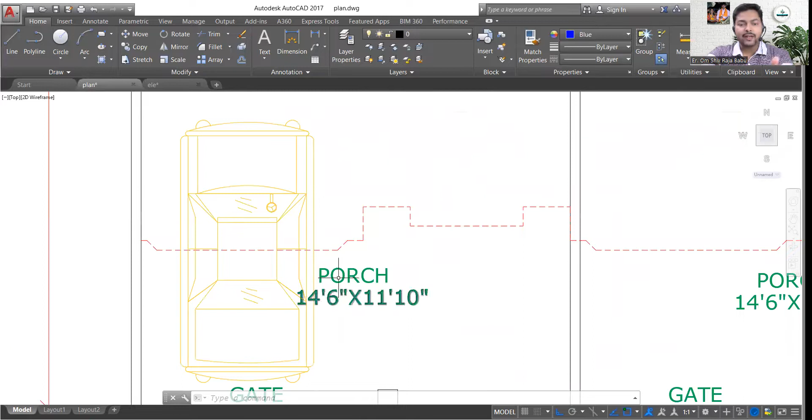Now for this north facing building, both units are identical. I will read out the left one and you will easily understand the right one. Here is our gate, which is 8 feet wide, a spacious one. Then we have a porch area of 14 feet 6 inches by 11 feet 10 inches, spacious enough to park one four-wheeler and two to three two-wheelers.

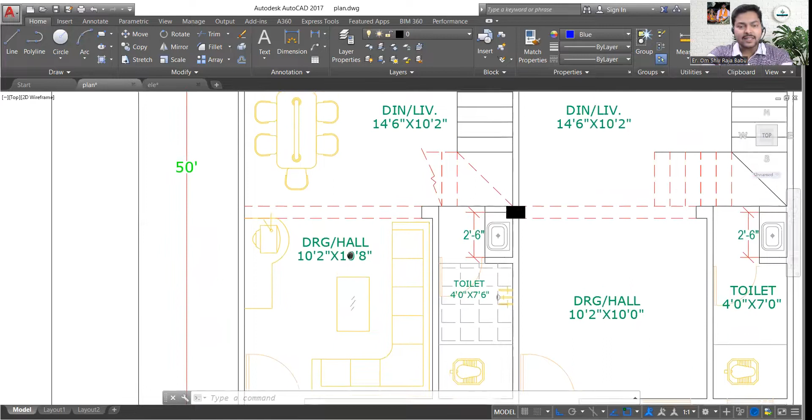Then we have a drawing room, or hall, of 10 feet 2 inches by 10 feet 8 inches, a standard size hall. Even with a small front, you can get a spacious internal area like this and make the most of your carpet area. As you pass through this hall, you go to the dining cum living area, and you will find the staircase from here.

On the right we have our plan layout, and on the left our furniture layout. In a furniture layout we already place the furniture so we can identify how much space we have for movement and the right place for our furniture. So whenever you approach an architect, ask for the furniture layout, not just the plan layout. That will help you visualize your house.

You can use this staircase to reach the first floor, because this is a G+1 building. Beneath the staircase we have our utility area of 2 feet 6 inches, which is quite enough. Then we have our toilet of 4 feet by 7 feet 6 inches, a good internal dimension for a toilet.

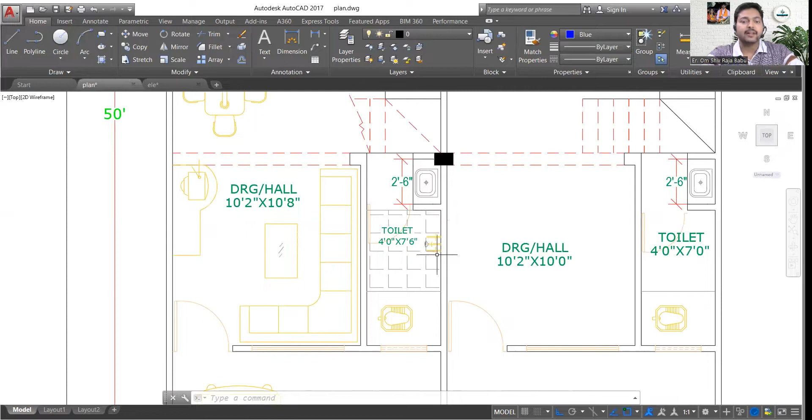Moving on, you will find the kitchen. This kitchen couldn't have much space, so we placed the fridge outside the kitchen, and this corner easily accommodates it. The slab is 2 feet 6 inches wide and 12 feet long, because the kitchen dimension is 5 feet 4 inches by 12 feet. We cannot go for a slab on two different sides, but we can go like this. This is quite a good approach, and I really appreciate the architect.

This kitchen also opens into the wash area of 10 feet by 4 feet, quite wide, and this opens to the storeroom, which is 4 feet 2 inches by 4 feet.

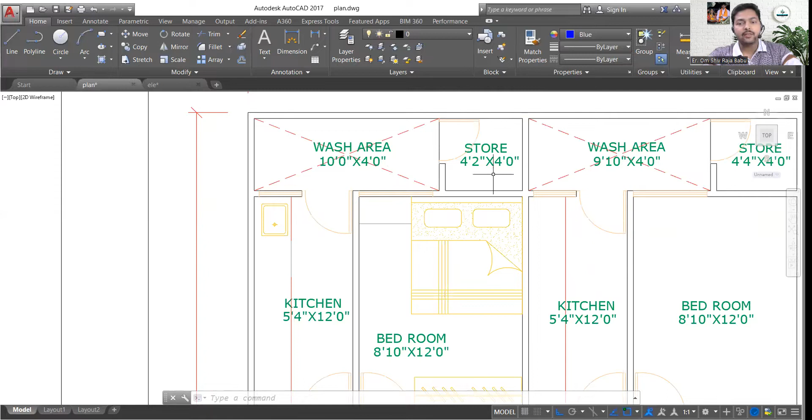Just beside our kitchen we have our bedroom, with a dimension of 8 feet 10 inches by 12 feet. Normally, if the shorter dimension of a room is 10 feet, it is considered a big room. But this whole building has a small front, which is why we cannot go for that.

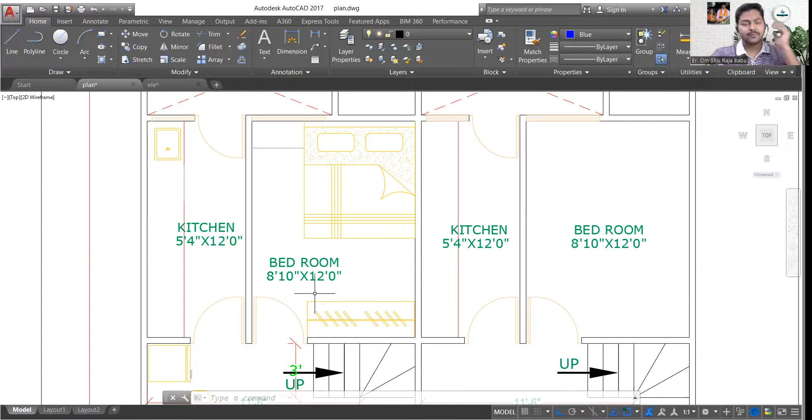Okay, so even 8 feet 10 inches by 12 feet is a good space that this architect has planned over here. Okay, so I just appreciate this effort. Okay, now you can see we have read out the ground floor. Now we have to read the first floor.

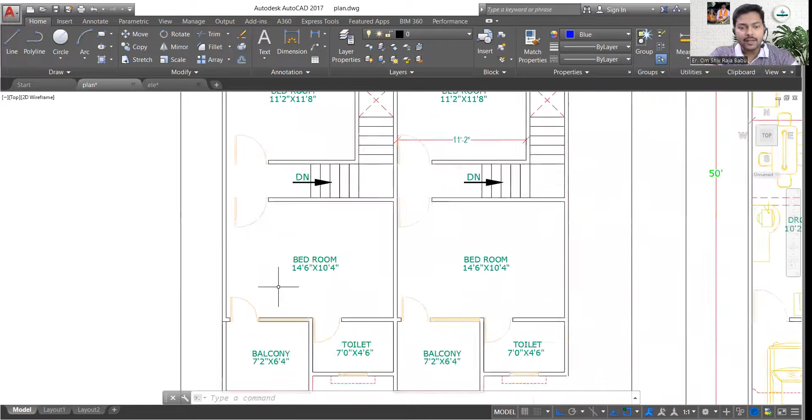Whenever we have to read the first floor, we will always take our stairs to reach the first floor. Okay, so you can see I am going from here, and through this stair I will reach the first floor over here. And you can see in the front we have a bedroom of 14 feet 6 inches by 10 feet 4 inches. Then we have a wide balcony, because this balcony has a carpet area of 7 feet 2 inches by 6 feet 4 inches.

And this bedroom is not just a simple bedroom, it is a master bedroom with an attached toilet of dimension 7 feet by 4 feet 6 inches. Again, a good space for the toilet. Then we can see in this direction we have again a door, and this door is opening to a bedroom which is 11 feet 2 inches by 11 feet 8 inches.

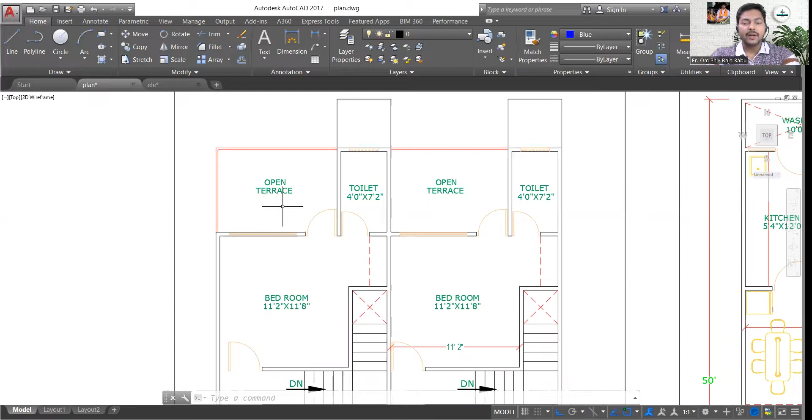And again, this is a master bedroom, so the attached toilet is 4 feet by 7 feet 2 inches, and it is also getting a big open terrace area. So this is bigger than what we have in the front. Okay, so you can easily compare over here. And then this is a simple rectangle or square shape that you are identifying over here. So what is this one? This is the roof of the storeroom.

Okay, so guys, that was all for the plan.

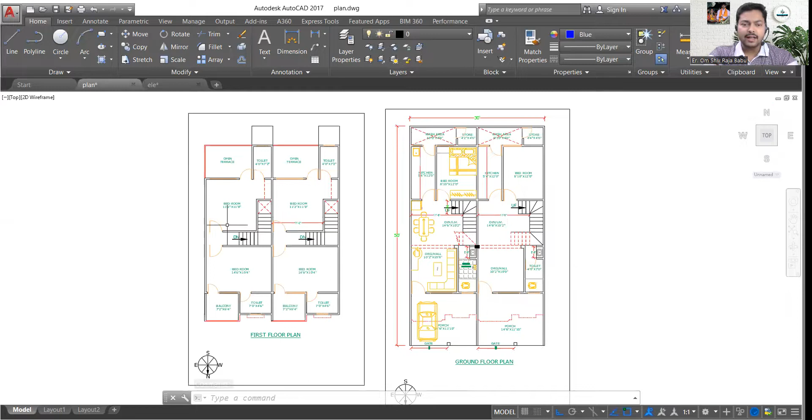Now, we are going to read out the elevation over here. So, you can see this is our elevation, and this elevation is quite impressive. I'm not reading the second half of this plan, because both are identical. The left and the right portion are identical on both the floors. That means the ground floor and the first floor. Okay, then you can see over here in the elevation portion, I will just read out the left portion.

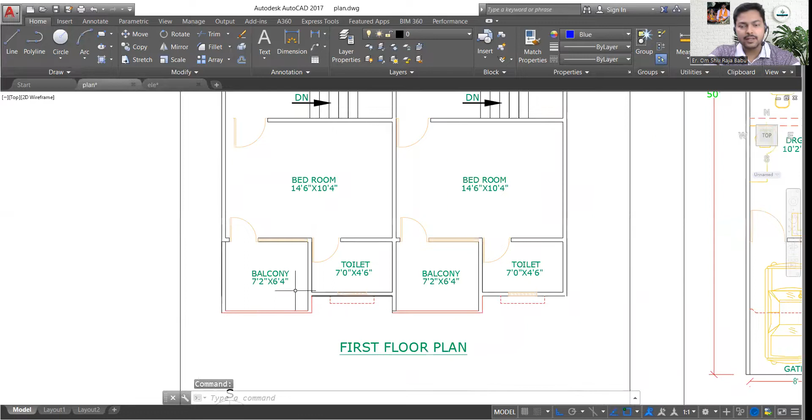So we have the door over here, then we have a window, and then we have this ventilator that was provided in the toilet area. So you can just read it in relation with the balcony over here. Okay, now you can see here is the ventilation for the toilet on the first floor. Then this is the balcony area or the open terrace area that you can see over here, and this is the parapet wall, which is using square pipes over here.

Then this elevation is quite good, and this is impressive work, and you can simply use the groovings over here to make this look good. And if you just use a gray color, then that will just add to it. Then you can see we have a sunk circle over here. That means this area will be vacant, and this will again add to the beauty of your building. And this is the brickwork over here.

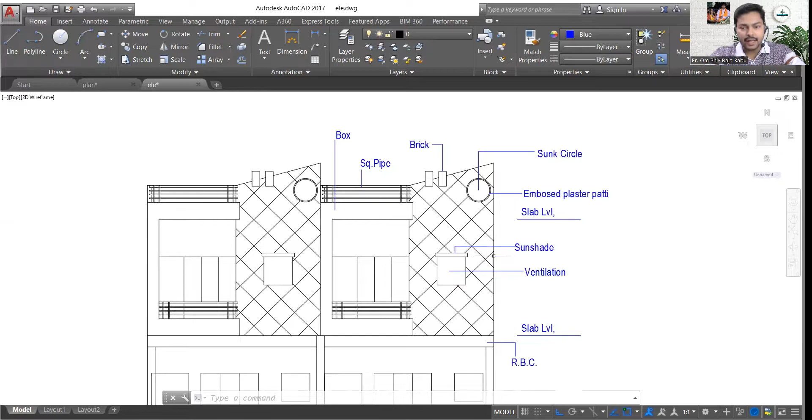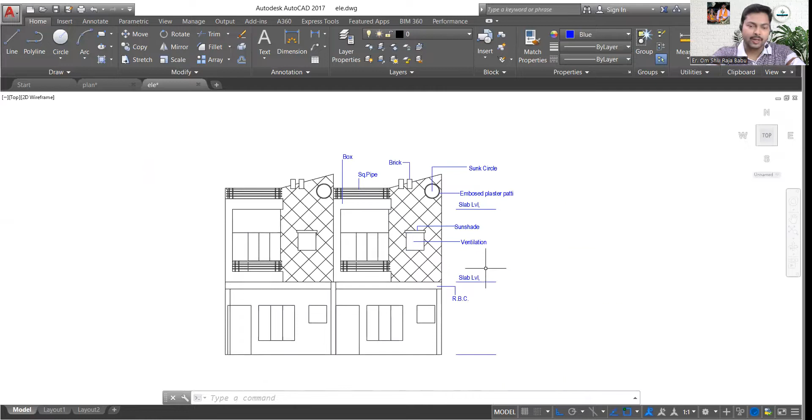Then here we have the box design, and then you can see we have this sunshade over here, which you also call chhaja. Okay, then for the ventilation of the toilet, this is the ventilator. Okay, now here is the slab level over here, and around the circle we have this embossed plaster patti. Okay, so this is the next slab level, which is of RBC. Okay, now that is all about the elevation, and I personally like the elevation. So in total, for the arrangement of the rooms and everything, I will rate this plan 8 on 10.

Okay, now what could have been better in this plan? So that is one thing that will be my input over here. So you can just extend this wall a little bit over here, so that you can provide a passage to this area also, and it can also be used as an open terrace area over here. And this can be used whenever you require extra space in your building.

Okay, or, this is the second suggestion, you can simply shift this toilet to this end and use the front area as the open terrace area. That would have been a better arrangement over here. Then you will not have to add any space over here, and with the same materials that you are using to construct your building, you can get more space over here. Okay, so these are the two suggestions that you can use.